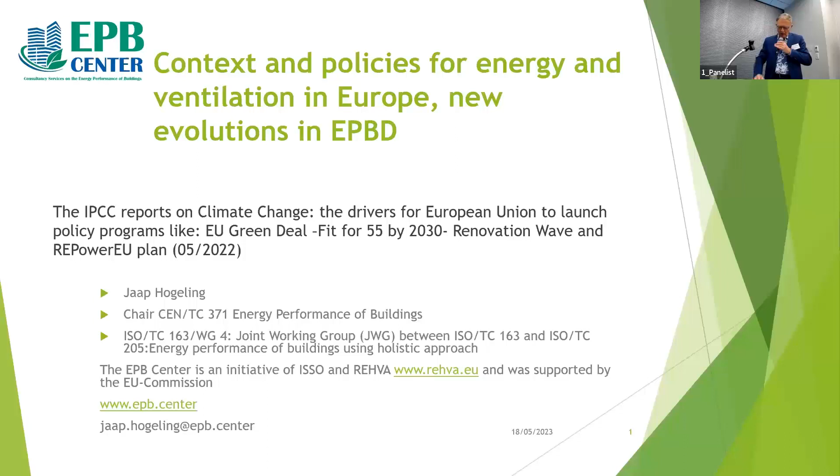Okay, can you remove this? Well, this slide already says on my background that was explained by you, Peter. Oh, I have to use the mouse. Okay. Yeah, okay.

Well, this presentation is about the energy performance of buildings and the impact of the new energy performance of buildings directive related to indoor environmental quality.

But first, I will say a few words on why and how we organize this in Europe, and why we have an Energy Performance of Buildings Directive, which says at European level that member states should make national regulations to control the energy performance of buildings. This directive is the basis for the national regulations in Europe.

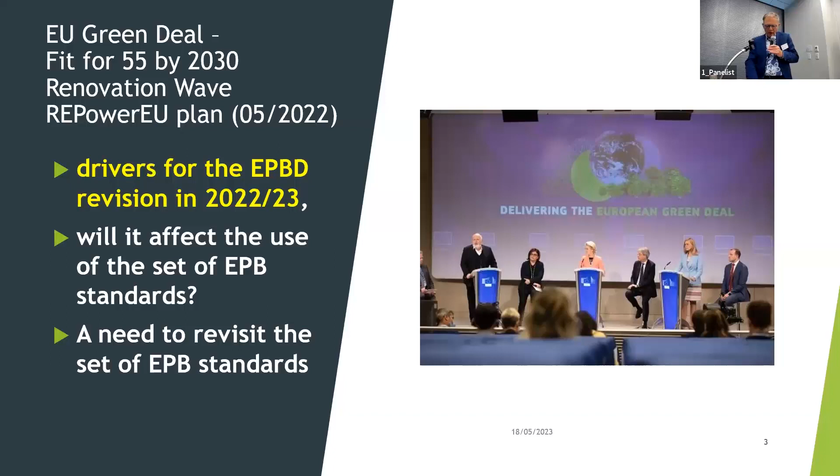The question now is, does this impact the energy performance of building standards? Based on the directive, we developed in CEN, the European Standard Organization, and in ISO, a set of energy performance of building standards that can be used to assess the energy performance of buildings. Member states are expected to use these standards, or national standards meeting the requirements set in these standards. So the question is, is there a need to revisit the standards?

The answer is yes. The directive says that buildings are acknowledged as one of the key factors and key focus areas for the Green Deal and the renovation strategy. Currently, the renovation rate of buildings in Europe is around 1.5%, talking about deep renovation to the level required by 2030. This should be doubled to 3%, which is quite an effort, given the workforce you need for that.

In the renovation wave, we have some focus areas: especially tackling the energy poverty of worst performing buildings, making them towards healthy housing. Also for authorities, leading examples for renovating public buildings owned by the authorities. And the decarbonization of the energy delivered to and exported from buildings — that is also a highlight and focus in the renovation wave.

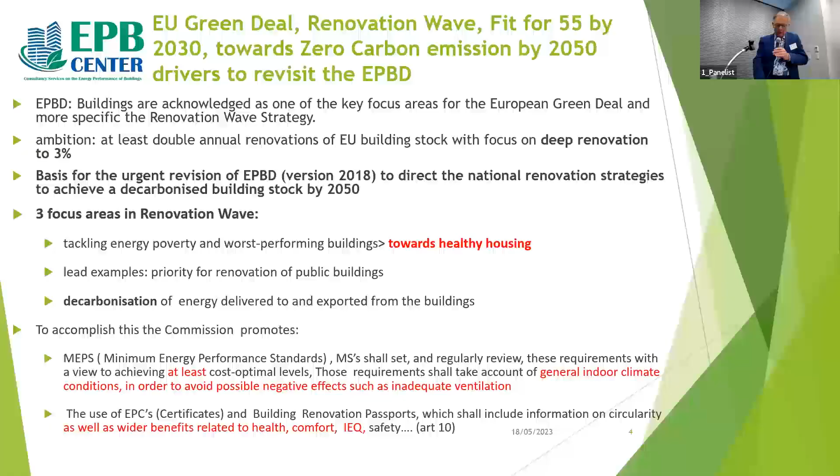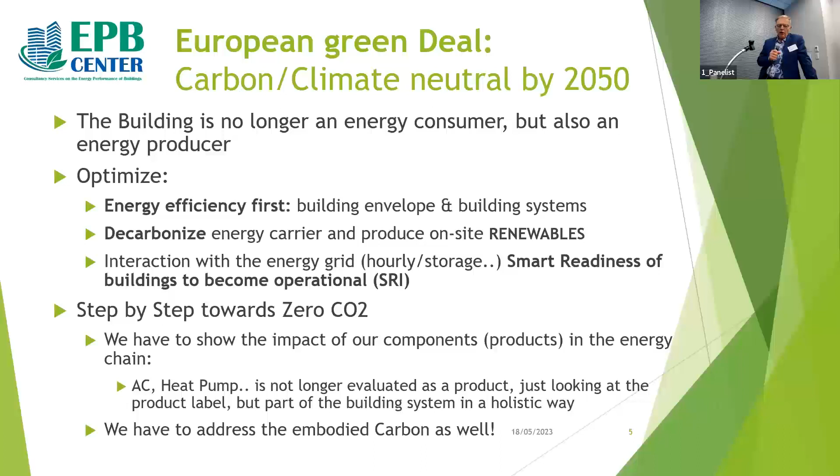In the Green Deal and the movement toward carbon and climate neutral buildings by 2050, we consider the building no longer just an energy consumer, but also a producer. In the EPBD, we say first we have to reduce the energy use of a building, so energy efficiency first, looking at the building envelope and systems. Then decarbonize the energy carrier and produce on-site renewables, and the interaction with the energy grid has to take place.

Smart readiness, and it should be operational, meaning the building should know when the grid delivers very low carbon energy. Step by step towards zero carbon, we have to show the impact of our components and products in the energy chain. So products like air conditioners or heat pumps are no longer evaluated just looking at the product label, but as part of a building system in a holistic way. And finally, we also have to address the embodied carbon.

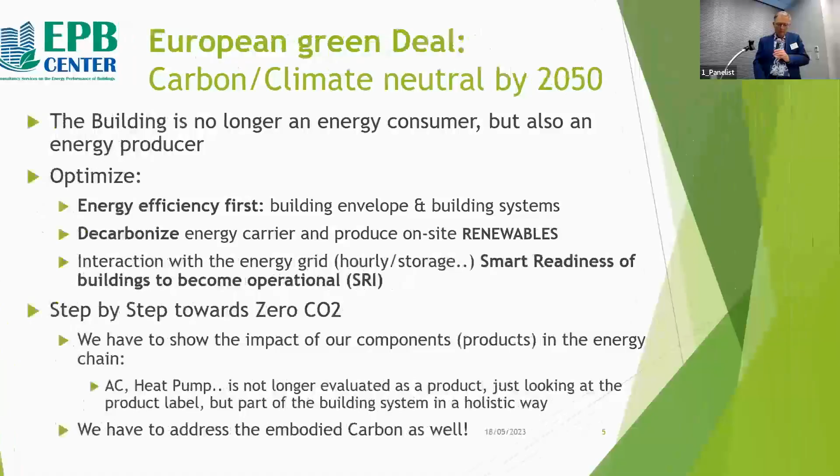On the EPBD revision, there are also many basic assumptions, as we say recitals, that are the basis for finally the text of the directive. One of the recitals is that in the revision process and negotiations between the Commission, the Parliament, the Council of Governments and relevant stakeholders, the need to regulate the energy performance of buildings and the indoor environmental quality of buildings in the same way. So that should be a starting point.

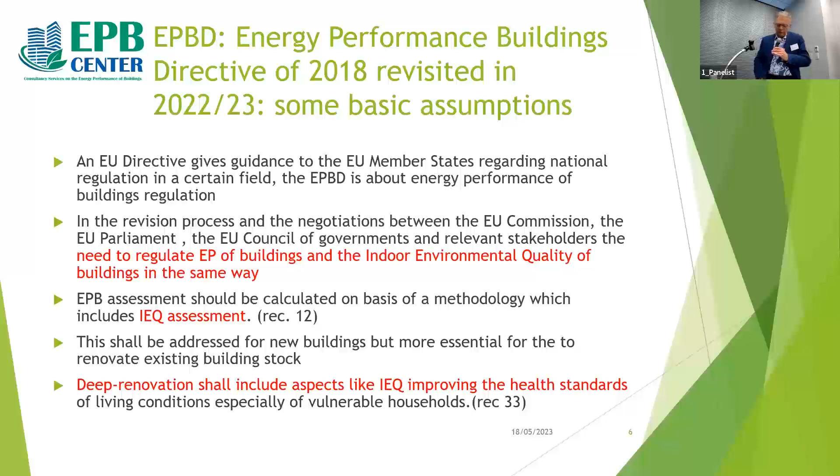Also, the energy performance of buildings assessment should be calculated on the basis of a methodology which includes the indoor environmental quality assessment. And deep renovation shall include aspects like indoor environmental quality, improving the health standards and living conditions, especially for vulnerable households, because we have also a lot of them in Europe.

Other basic assumptions are that the upgrades of the energy performance should include also the health aspect of indoor environmental quality. And energy certificates of buildings should include both data on the energy performance and on indoor environmental quality, and recommendations to improve the energy performance, and report about the life cycle analysis and global warming potential.

Better, high performance buildings should avoid overheating and have improved indoor environmental quality conditions, and care about the microclimate around buildings, which is of course a hot issue in city environments.

Delegated acts are needed by '27 on the cost optimality of minimum energy performance towards zero emission buildings, life cycle global warming potential, respecting at the same time the indoor environmental quality standards. Delegated acts are additions to the directive which are stronger - they are more a regulation that member states have to follow.

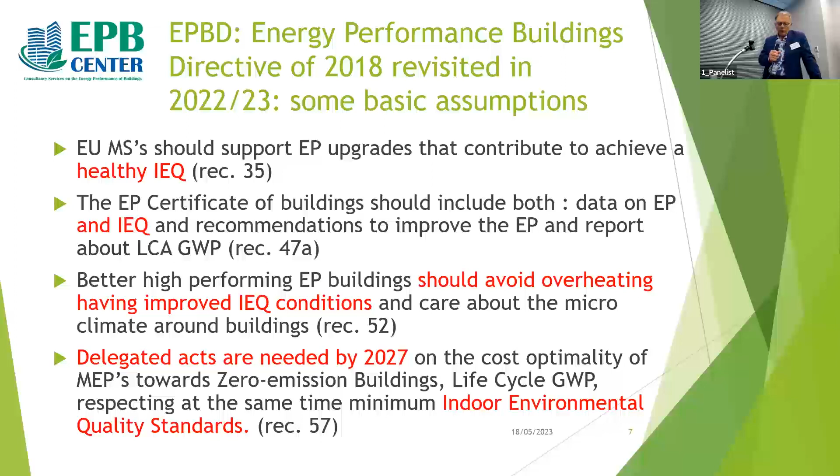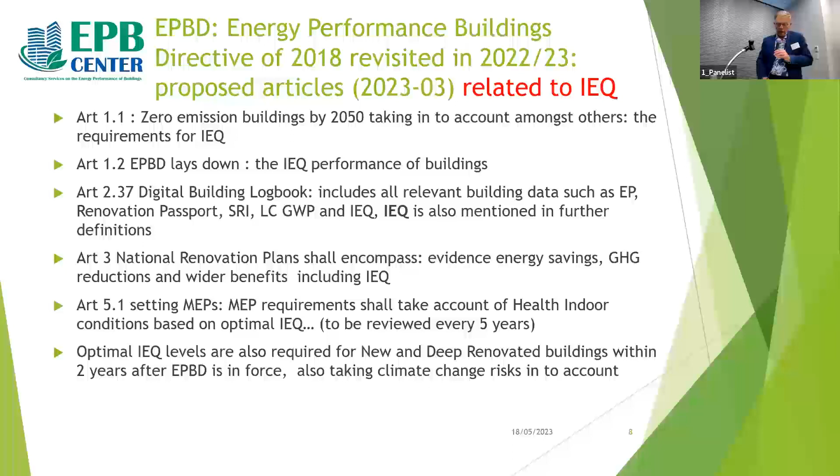The building passports shall comprise information on circularity as well as wider benefits for health and comfort. And technical building systems require installations for measuring and control devices for monitoring and regulation of indoor environmental quality at relevant unit level, where technically and economically feasible, and where measurable health benefits are taken into account, for the following buildings.

These are generally zero emission buildings, so buildings expected to be built after 2030: new buildings, existing buildings which are majorly renovated - so deeply renovated to zero level - non-residential buildings with a combined heating and cooling capacity of 70 kilowatts, and public buildings.

But it is, of course, said that it should be technically and economically feasible that these measurement and control devices are installed. The economic feasibility should take into account the measurable health benefits, so it's not just calculating if you can save energy with it, but also if you can reach a more healthy building by it.

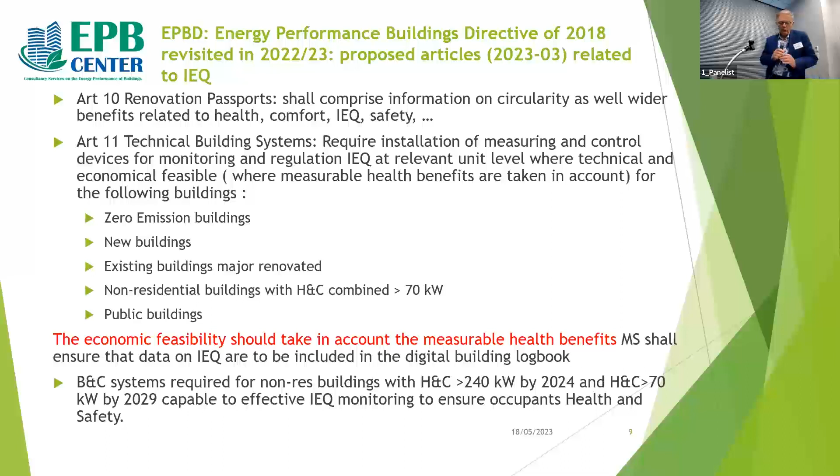The system requirements for non-residential buildings are already in force by '24, when buildings have a capacity of more than 240 kilowatts, and by '29, when it's more than 70 kilowatts - capable of effective indoor environmental quality monitoring to ensure the health and safety of the occupants.

In Article 11A it is said that member states shall set requirements on implementation of those indoor environmental quality standards in order to maintain a healthy indoor climate. And within 2 years after the EPBD is in force, these measurable indicators...

...are already included in levels, which is a system in Europe where you could say have subsidy and financial support available from the European Commission. This level framework should also include indoor environmental quality requirements on CO2 in rooms, temperature, relative humidity, daylight levels, ventilation rate, and acoustic comfort.

So we still have some discussion with the Commission and with the experts who are working on that, on how this should be implemented.

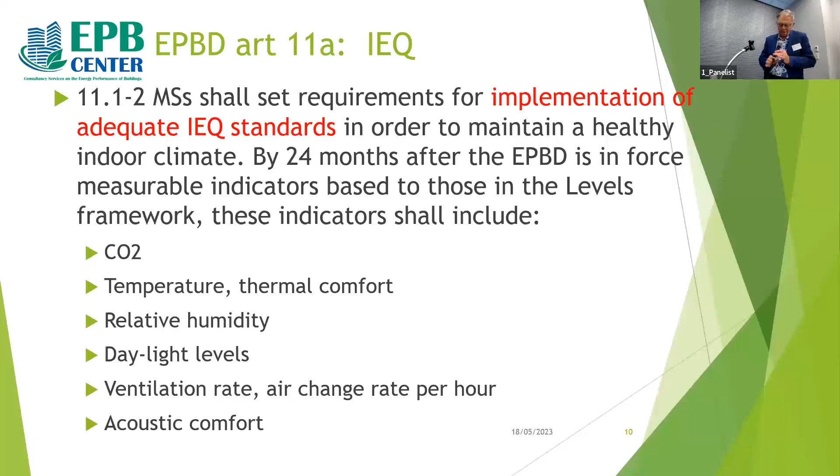And then in the EPBD, it is also said that on indoor environmental quality, particulate matter emissions from indoor sources and target pollutant limits for indoor sources on VOCs, classified as carcinogenic, mutagenic or toxic for reproduction according to regulation in Europe, including formaldehyde, shall be reported on the basis of available data at product level or direct measurement where available of relevant sources in relation to the indoor environmental situation in the building.

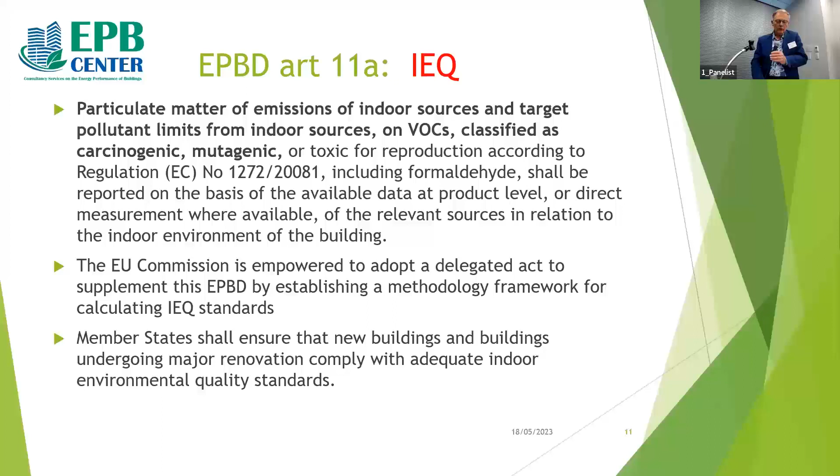So it means that PM2.5 is also a point of attention in the requirements, the set of requirements of indoor environmental quality. And the Commission again is empowered to adopt a delegated act to supplement the directive by establishing a methodology framework for calculating the indoor environmental quality standards and sets of requirements. And member states shall ensure that new buildings and buildings undergoing major renovation comply with these indoor environmental standards.

And in Article 13, it is also said that the Commission shall adopt delegated acts concerning the optional common union scheme for rating smart readiness for non-residential buildings. And that is important because smart readiness is also related to how to control the building and how to interact with the grid on a local level. The rating shall be based on an assessment of the capability of the building unit to adapt its operation to the needs of the occupant, particularly concerning indoor environmental quality and the grid, to improve energy efficiency and overall performance.

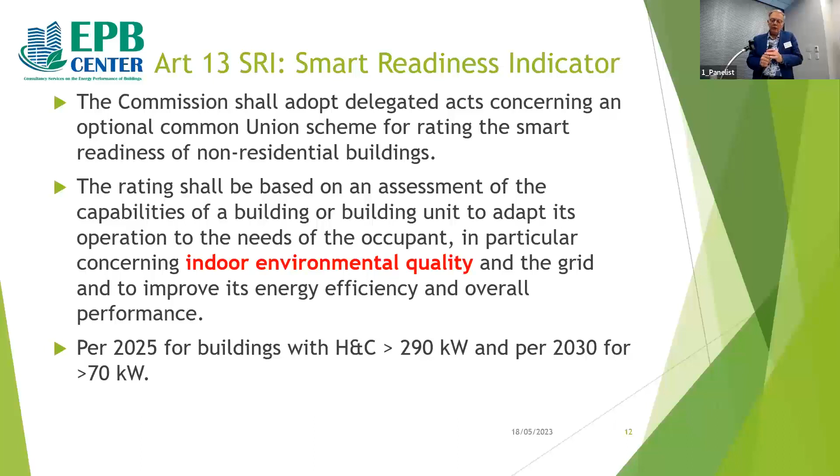So again, with smart readiness and grid interaction, indoor environmental quality is also mentioned, which means that you cannot just look at carbon neutrality and forget about indoor environmental quality.

In Article 15 and 16, well, in 15 we say there should be a one-stop shop for energy efficiency, supporting awareness and incentives for regulating indoor environmental quality. So please don't separate it from the energy performance measures and include it really in the energy performance certificate, the certificate as was shown in the previous slide, in the previous presentation, with the colors.

That sort of certificate shall include recommendations for cost-effective improvement of energy performance to cost-optimal level and reduction of the whole life cycle greenhouse gas emissions, and improvement of indoor environmental quality of a building and a building unit.

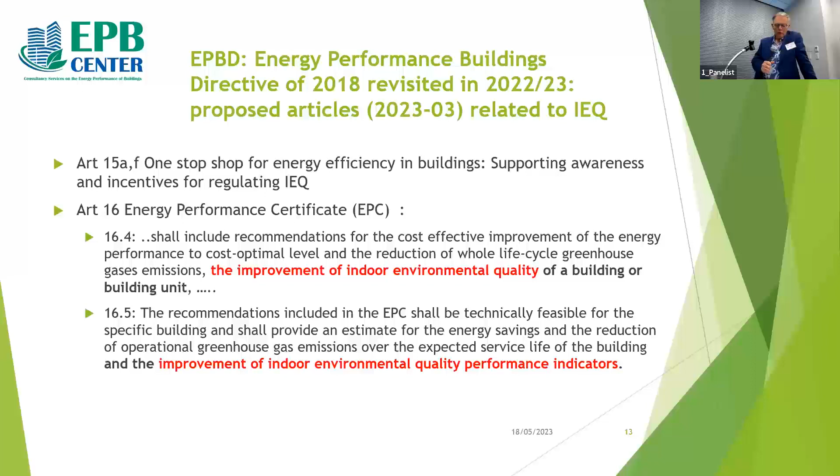So we expect that the energy performance certificate will have a page of information also on indoor environmental quality, and recommendations included in the certificate shall be technically feasible for the specific building and shall provide an estimate for energy savings and reduction of operational greenhouse gases over the expected service life of the building, and improvement of indoor environmental quality performance indicators.

In Annex 1 of the directive, several standards of the set of EPBD standards are mentioned, the overarching standards, the ISO 52000 series, the European standard EN 16798-1 on indoor environmental quality, and standards on primary energy and carbon emission factors or superseding documents. This provision shall not constitute legal codification of the standards. That means member states are not obliged to use the standards, but if they don't use the standard, their national method should be according to the standard. So that is a little bit complicated, but that is the way things are done in Europe.

The indoor environmental quality standard is about ventilation, about indoor environmental input parameters for design and assessment of energy performance of buildings, addressing indoor air quality, thermal environment, lighting and acoustics. And I think tomorrow there will be a presentation around the update of this standard.

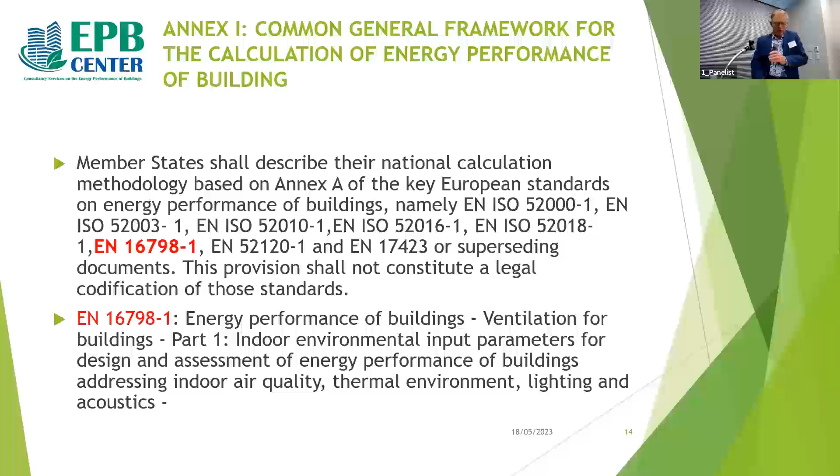And in addition, in Annex 5, we give a template for the energy certificates of buildings. And there you also find that you have to indicate the presence of fixed sensors that monitor the levels of indoor environmental quality, the presence of fixed controls that respond to levels of indoor environmental quality, the operational fine particulate matter, the PM2.5 emissions, and performance indicators for main categories of indoor environmental quality once relevant provisions apply. So in Annex 5, it is said what sort of information you should include in the certificate.

And there we see also a strong statement on these data. Well, before I end my presentation, I have to say that this presentation is based on a text of the directive that was amended by the European Parliament and published in March this year. Now the Commission, the European Parliament representatives, and the Council are negotiating about the final text. So if all the lines I presented here are kept in the final text, I don't know.